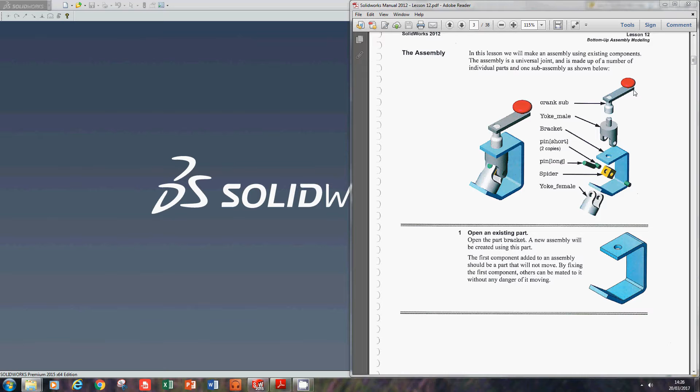The universal joint assembly is the one we're going to be covering in this video. To start with, we're going to create a sub-assembly of the crank sub you see here, which will consist of the knob, the arm and the crankshaft. We will then create the main assembly, and use this sub-assembly and add it to our main assembly. So let's jump straight in.

So I have Solidworks open here. I'm going to click on New, click on Assembly, and click OK. You'll see that it has popped open a dialog box here on the left hand side.

To begin the assembly, as it's saying here, I need to first add my first component. So to add my first one, I click on Browse here on the left hand side, and I navigate to wherever the folder of the parts that I want to use in the assembly is. For me it's already in it, and this is the first part I'm going to be adding to this assembly - this is the crank arm.

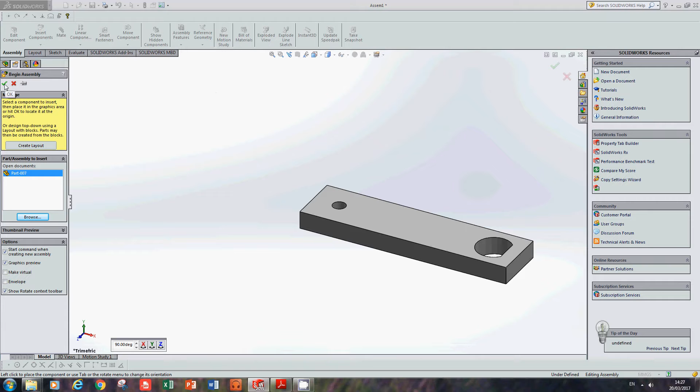So you'll see the arm is here, and to drop my first component, I don't just drop it anywhere. I come across to the left hand side and click the green tick, which is OK. Apologies for the pop-ups - what that does is place the first part and align it with the planes, the origin planes of the assembly itself.

So that's my first part dropped. A couple of things to note here - you'll see that this first part has a little F in brackets beside it, which means that part itself is fixed. If I left click and hold on this part, I can't drag and move it anywhere, so it's fixed in the space of the assembly.

That's what we're looking for every time we drop our first part. With any subsequent parts that we drop, we will be constraining them and adding mates to restrict their movement in relation to the first part or any previous parts that have been dropped, to remove their degrees of freedom.

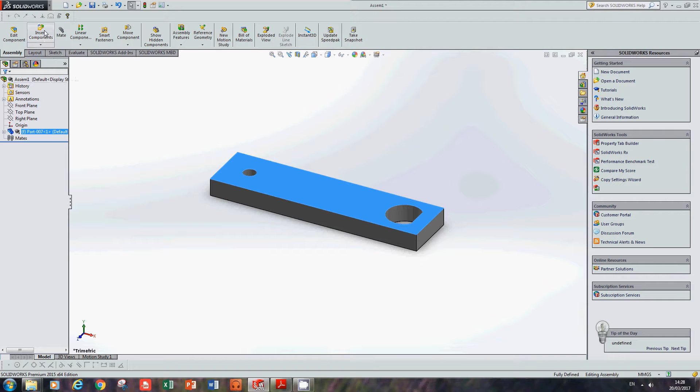So I'll come up to the top and go to Insert Components, click on that, and again I need to browse to wherever my components are. The second part I'm going to drop is part number 8. Click on OK, and for this second part I can just drop it anywhere I want here on the screen, so I'm just going to drop it there.

Again, these pop-ups are coming up because the parts were created in the educational version - you may have the same yourself. So the second part is dropped. If I click on that, you'll see that it's free to move - it can move anywhere within the space of the assembly. I need to remove those degrees of freedom.

In order to do that, I need to add a mate. So up to the top again and click on the paperclip and click on Mate. Unfortunately I've left a face selected before coming into mate, so I need to delete that from the selected regions. Now I'm free to pick what surfaces I want.

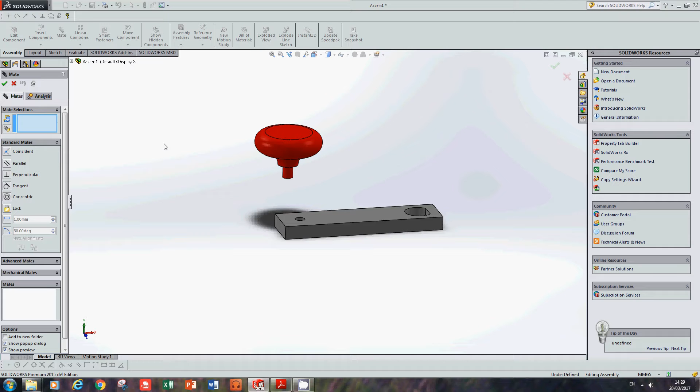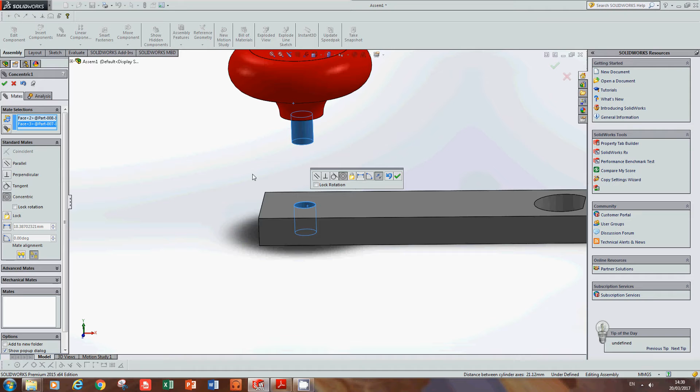The surfaces I want to mate - I want to align the center axis of this, so I click on this face here with the center axis of this hole, and you'll see it moves to align. Solidworks is quite intuitive and will make an assumption on what mate you want to apply - there are different mate types: parallel, perpendicular, tangent. Concentric is what I'm looking for in this case, so I can click OK, but always check before you click OK and apply the mate.

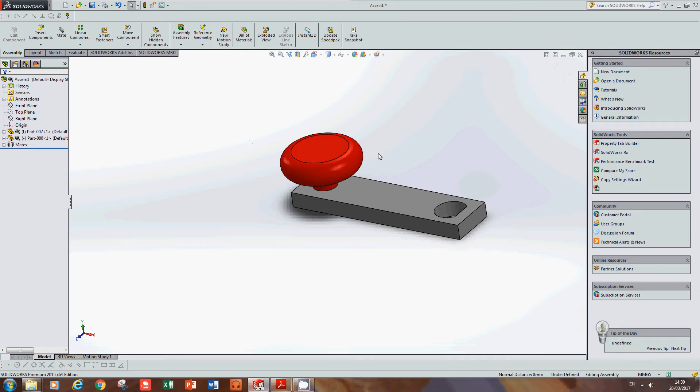Next thing I need to do is click on this top face and click on the underside of this face here, and that'll lock it to that. Coincident is the mate I want for this, because I want both of those planes or faces to be coincident, to be locked together, and I click OK to that. So that part is finished, and its degrees of freedom has been removed.

Next part I want to add - click on Insert Components, down along here to Browse, and click on part 9.

And this is the crankshaft. So I drop this again. I can drop this anywhere in space. Apologies for the pop-ups. So you'll see that this can still move - it's free to rotate. I need to do something similar to what I did with the knob with this crankshaft.

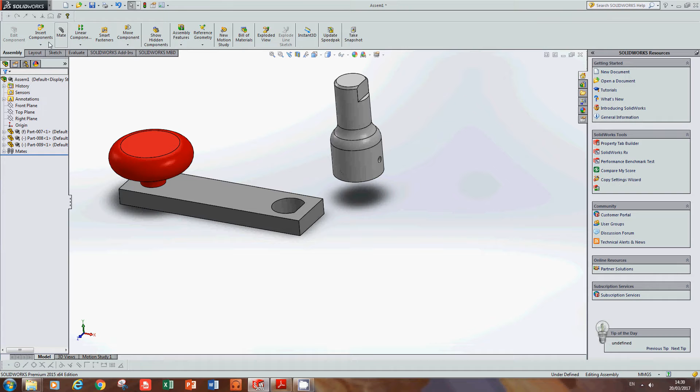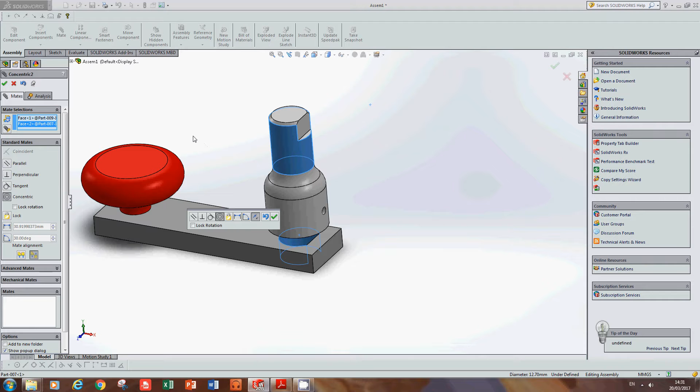So I click on mate again. I click on this outside face of the shaft, and this inside cylindrical face of the crank arm. Important thing to note: don't select edges or points where you can avoid it. We want to select axes or faces where we can, because it removes more degrees of freedom than selecting points or lines would. Double checking again that it's concentric.

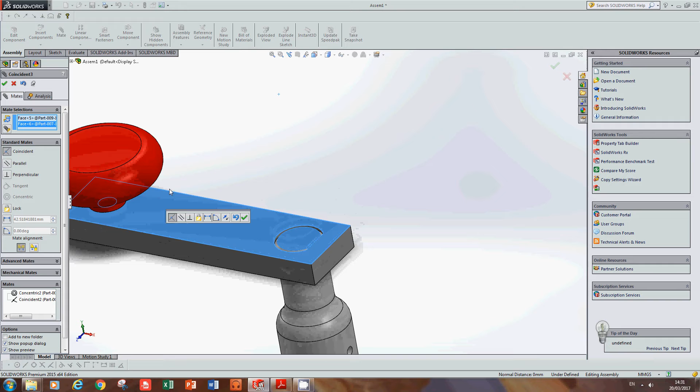It's exactly what I'm looking for, so I click OK to that. I want to align this face here with this face here. This has applied the coincident mate, which is what I wanted. Click OK to that, and then finally I'll select this face and this top face. Again, this is what I was looking for, so I click OK here.

So that's the first sub-assembly completed. You'll see that none of these parts can move.

So I'll save that, click on save, rebuild and save the document, and I'm going to call this assembly 1 - assembly 2 actually, for reasons that will become clear later - and click save to that. So that's saved, I can close that.

I'll just minimize that out of my way and come up and start on new. So I'm clicking on new assembly and click OK again.

Just to pop back to the drawing, in all cases when you're starting an assembly, you'd start with the main component, which would tend to be the largest component in a lot of cases. For this sub-assembly we started with the crank arm. For this main assembly we're going to start with the bracket, and then we'll build our assembly up around it - so it'll be the bracket, yoke male, yoke female, and so on and so forth.

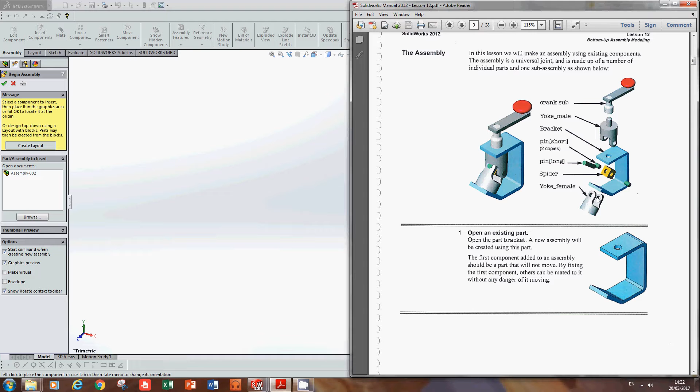Back into SolidWorks. Now just to notice here, you'll see that Open Documents tab, because I've left that previous crank assembly open, it's still active if I wanted to drop it. Now I don't want to drop it just yet, so instead I come in here and click on Browse, and I go to Part 1, and click Open to that.

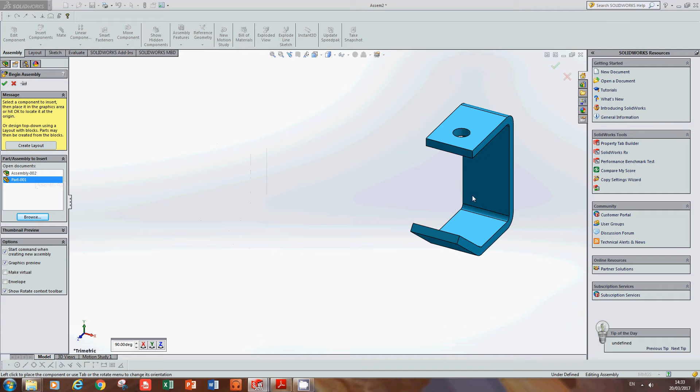I'm going to just make sure that you've just Part 1 selected, don't have the assembly selected. Just to reiterate, don't just drop it anywhere here - be sure and click OK, so that that first part is aligned with the origin planes of the assembly itself. So that's my first part dropped. Again, you'll notice a little F in brackets, which means it's fixed.

So I can continue to add some more components. Insert components, browse, and the next part I want to add is part number 2. Drop part number 2 in here.

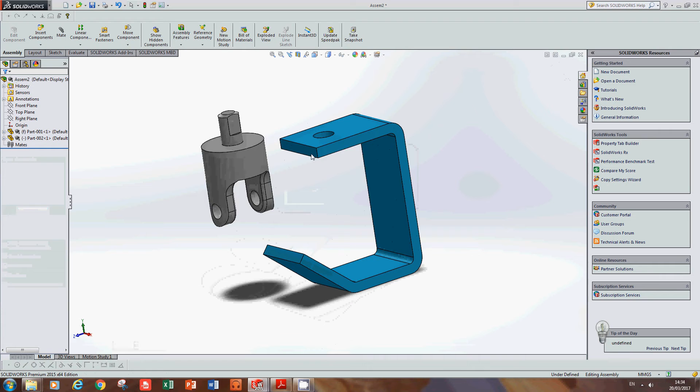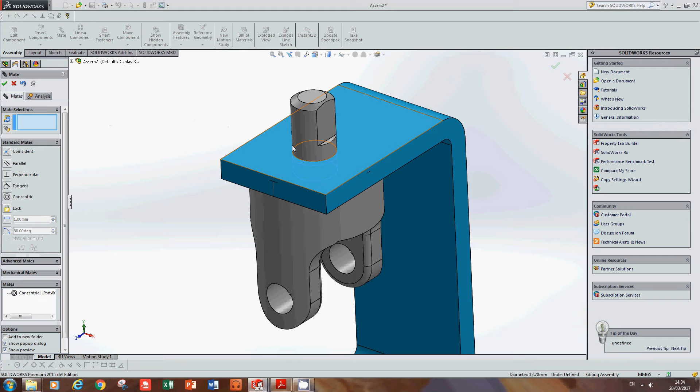So I'm adding my mates again to remove its degrees of freedom. In this case, I'm going to click on mate, this cylindrical face of the part, and this inside face of the bracket - don't click the edge, click on the face where possible. Concentric, just double checking my mate, so concentric is what I was looking for, and I can click OK to that to add it.

Now the next thing I want to add is a constraint or mate from this top face of the part I just dropped to the underneath of this face. Now I can't click on that face yet because it's hidden inside the bracket itself. If I want to get access to it, just left click on the part and you'll see that I can move it. Now be careful when you're doing that, because if I had left clicked and released, it would have selected the face, but when you left click and hold, it doesn't.

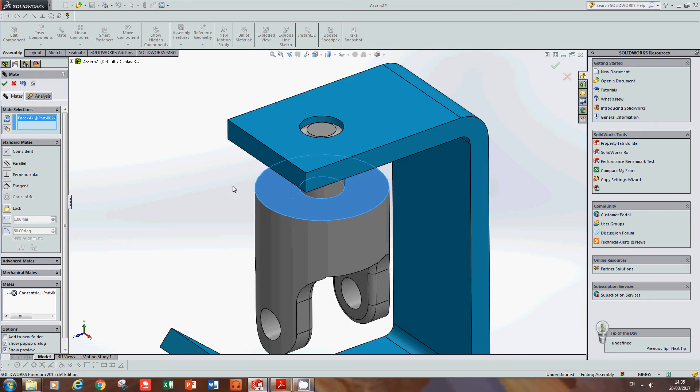So I'm just going to delete that out of there, and you'll see there, this is left clicking and holding, it doesn't select the face. Click on that top face, underneath of this, double check on my mate, which is coincident is what I want, and click add finish. And that's both mates - I don't need any more mates for now on that part.

Click OK, up to your insert components again, browse, and part number 3. So part number 3 is the spider. For this I can just drop it anywhere at all. Again, apologies for the beeping and the errors.

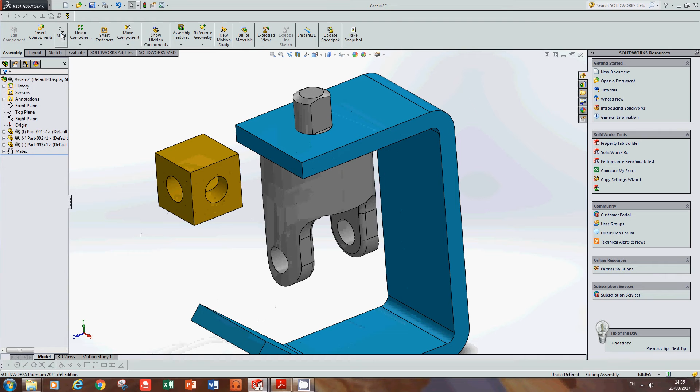Click on mate, and now I want to align the center axis of this part - the axis coming through here this direction - with this axis coming through the previous part. So I click on that center, that inside face, and I click on this face here, and that has aligned the axis of both of those.

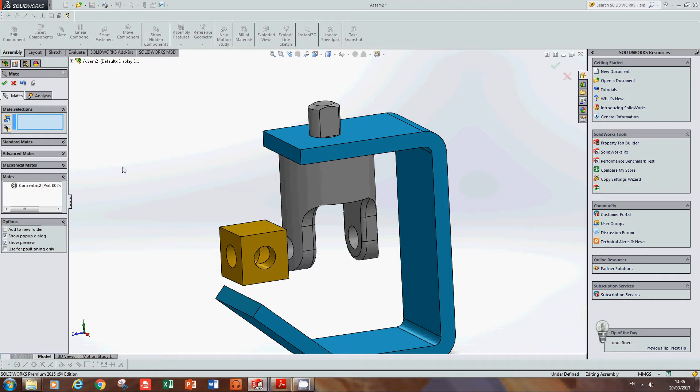Now I'm going to go into a different mate. These are standard mates we've been applying up until now, a selection of standard mates. For this next one, I want to apply an advanced mate.

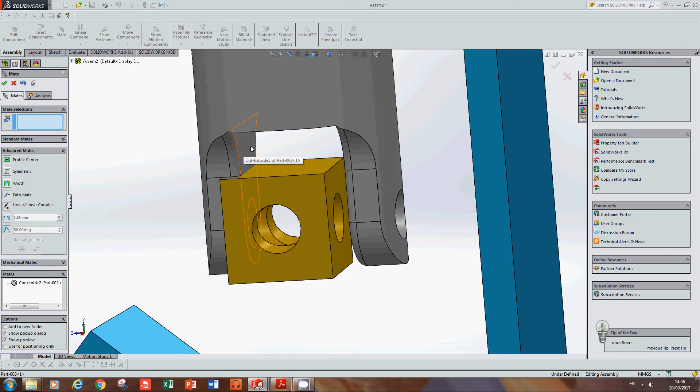What I'm looking to do in this case is move this roughly into the center of it for now - bit off center. When we're modeling, we'll be modeling for the ideal scenario, which means I want to have this part directly in the center of this gap, this width we'll call it for now. In order to do that, I apply a width mate.

What that does is, say for instance this edge was 20 and the gap was 25, if I apply a width mate, it will leave 2.5 of a gap on the left hand side and 2.5 on the right hand side, so it keeps it symmetric. But don't use the symmetric constraint, use the width.

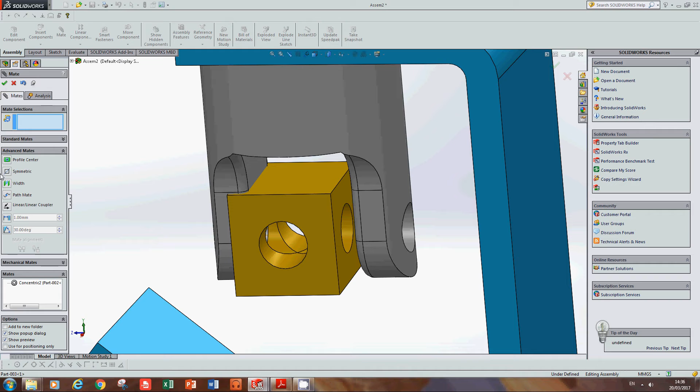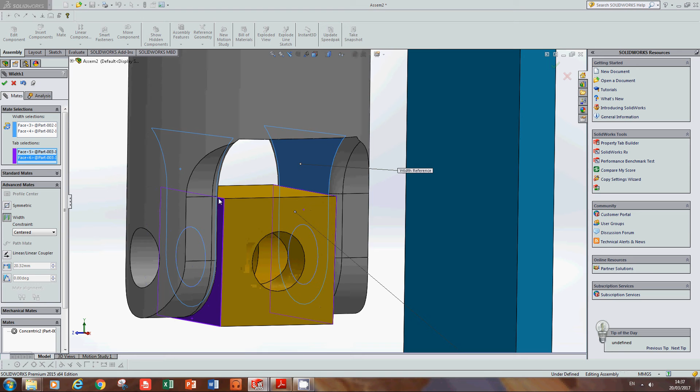So we click on width, and the first thing it's looking for is width selection. For that I select my outer edges - this face here and this face here of my first part, the larger part. Next I want to select the tabs, so this face here and this face here. You'll see that it has moved such that it's perfectly central to the gap itself, and click OK.

That's all the mates I need to apply to that part for now. So this is free to move - it still has 1 degree of freedom, but we'll look at that in the next couple of parts.

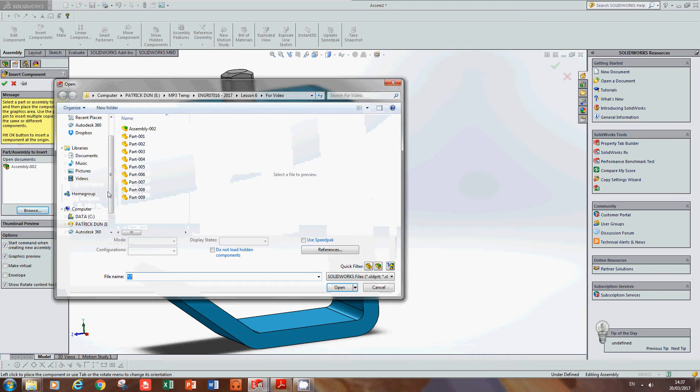Insert component, browse, part number 4 - the long pin. I'll drop that anywhere. Click on mate, click on the cylindrical face of this part, and the cylindrical face here as well. That's aligning it concentric, exactly what I'm looking for.

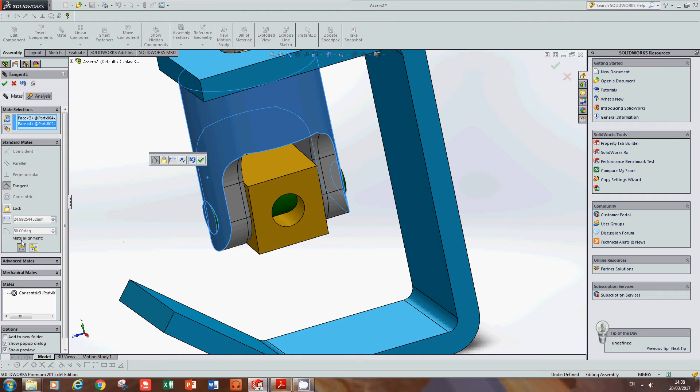Next I want to align this face with this face, and I want them to come in flush like that. Just to highlight another command that might have popped up for some of you - sometimes it will anti-align or misalign the parts. So this is aligned and anti-aligned. You'll see here that this has the pin outside of the part, which isn't what I'm looking for. In order to flip that direction, I just click on aligned.

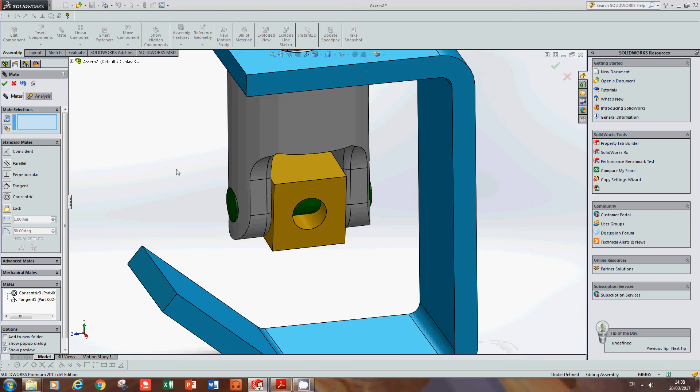If you think it's completely opposite to what you want, try this button here, this mate alignment. So that's what I'm looking for there. Click apply, click OK again to that.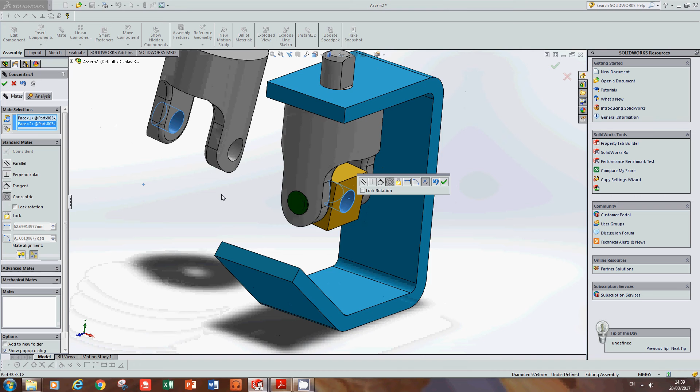Next component, browse, part number 5, which is yoke female. Just dropping that here, and the first mate I'm going to apply is mate, cylindrical face, and cylindrical face here. That's aligning those - click OK to that.

Next mate I'm going to apply is the same as what I did with the yoke male. I want to apply the advanced mates here, and use this width. So select this face here, this face here - that's the 2 tabs for the larger part selected.

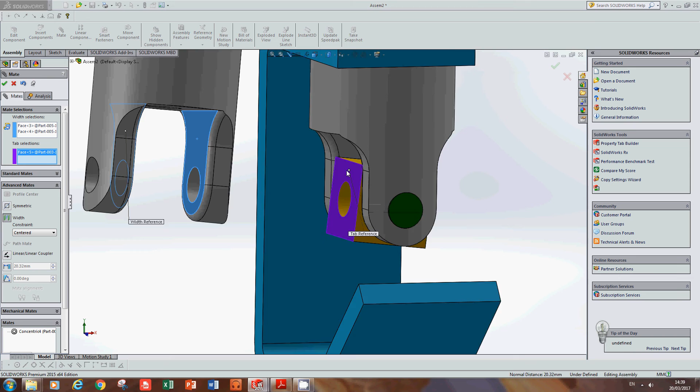Next I want to select the 2 tabs on the spider, selecting this face here and the opposite face on it, this one here. So that has aligned those and kept any gap that might be in the width of it, and kept it symmetric.

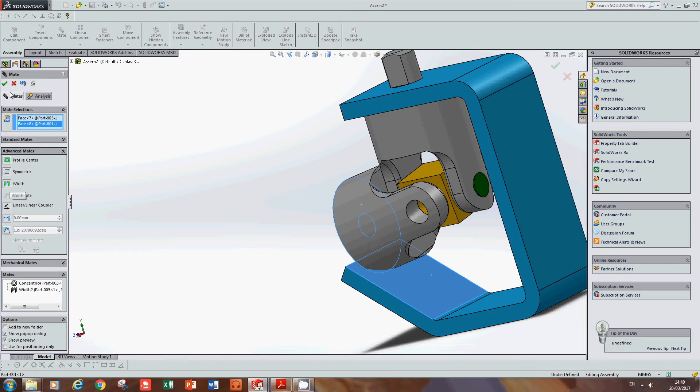Next I want to rotate this down, and I want to have this face parallel with this face. Unfortunately I left on the width constraint, so I just need to click cancel to that and start again. Click on mate, click this face here, and click on this face here, and that's applied my parallel relation here, which is what I was looking for.

If I needed to change it for any reason, you can click on it there. So click OK to that, and that's that guy dropped in.

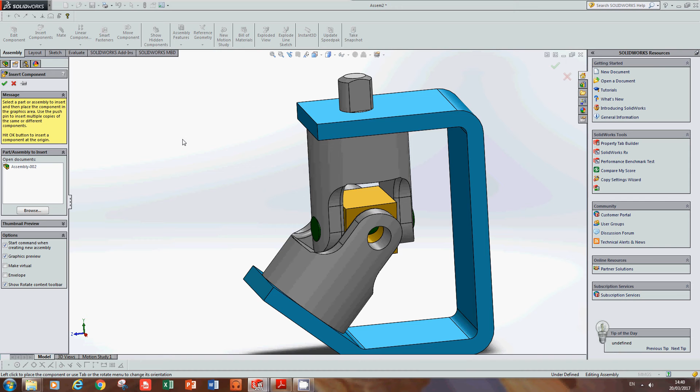Next component is part 6. So browse, part 6 is the short pin. Click OK to that.

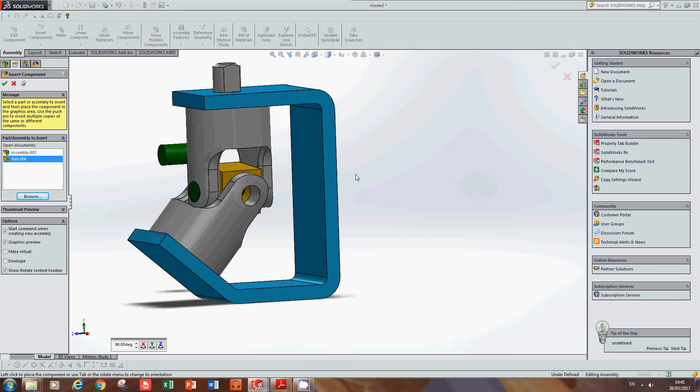Before I drop this part, notice this keep visible pin at the top. If I click on that before dropping a part, it allows me to drop multiple parts. So I can click on this, drop one, it'll leave it active for me to drop a second one, since I need two of these pins. I'll drop a second one, click OK, and then click OK to that.

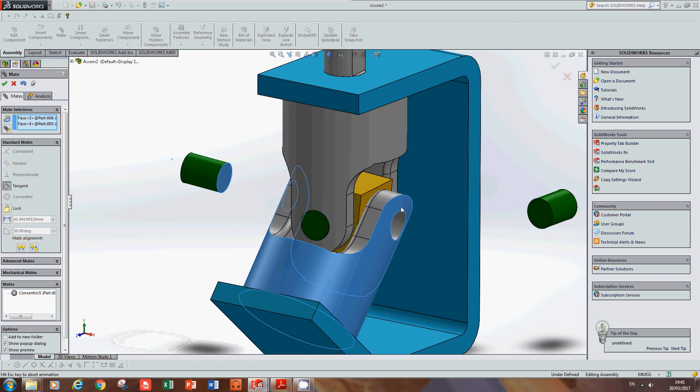Similar to the long pin, we need two relations or two mates here. Click on mate, cylindrical face here, cylindrical face here, that's the first one. Then select the end face of the pin and the end face here. Notice it has applied it in the wrong direction, so I just select aligned and it brings it across. Click OK to that.

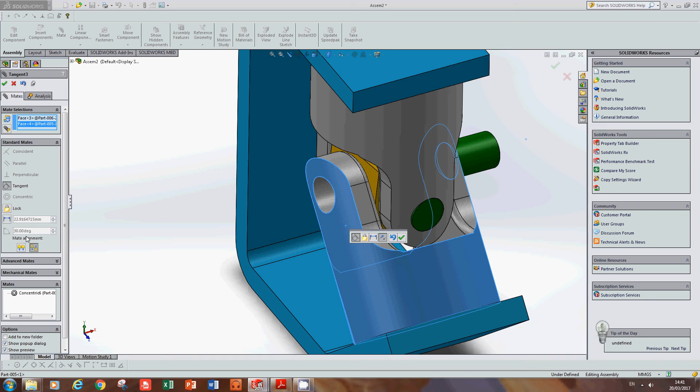That one's finished, so click on mate again, cylindrical face here, cylindrical face here, that's aligned. Then click on this face and this face. Again wrong side there, so click on aligned rather than anti-aligned, and click OK to that.

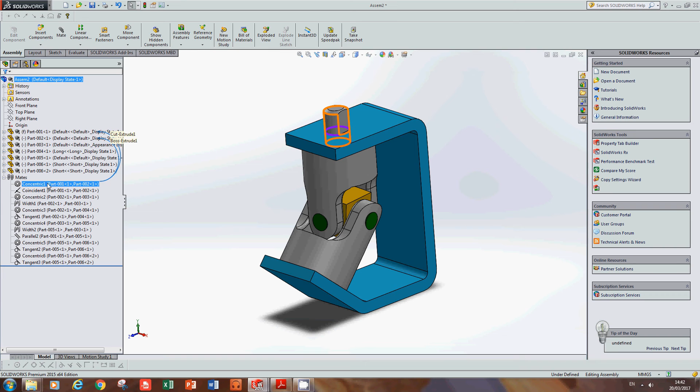Before I drop in that sub-assembly from previously, any mates I've applied go into a folder here at the bottom. It gives me a selection of whatever mates I've applied, tells me the type of mate and between which parts. So this is a concentric mate between part 1 and part 2, and it highlights it on the right hand side.

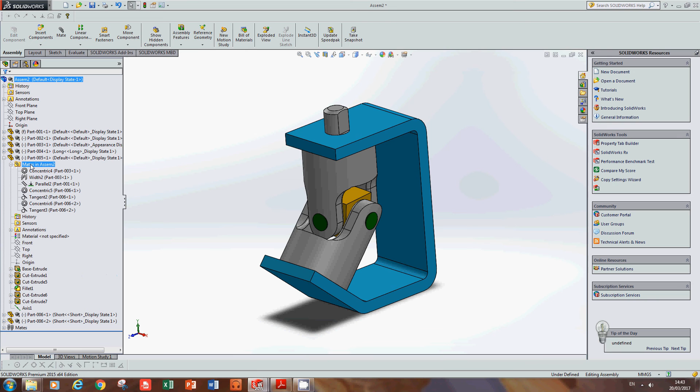I can also check the mates of each individual part by coming in here. If I click the plus beside the part and go down to mates in assembly 2 - assembly 2 is the assembly I'm working in since I haven't saved it as anything else - it tells me what mates have been applied to this part. So if I needed to delete or edit them, it's an easier way to find them by going into the individual parts if I know which part has the mate or constraint I need. You click the plus on any part and the top folder there should be mates in assembly, giving a selection of what mates are applied.

Final step is to add the crank handle assembly. I go to insert components, and now I can just click it from my open documents. If it wasn't there, I'd click browse and select it from there. So assembly, that's the one I'm looking for, and I'll just drop that anywhere.

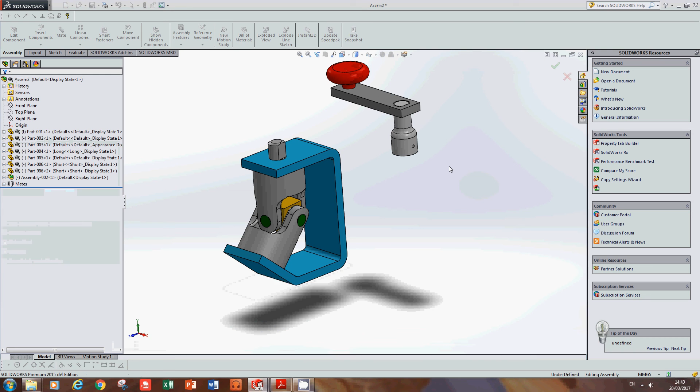Time to add the mates to this guy. So I want this cylindrical face here to be aligned with this face here. That has added my concentric mate. Click OK to that.

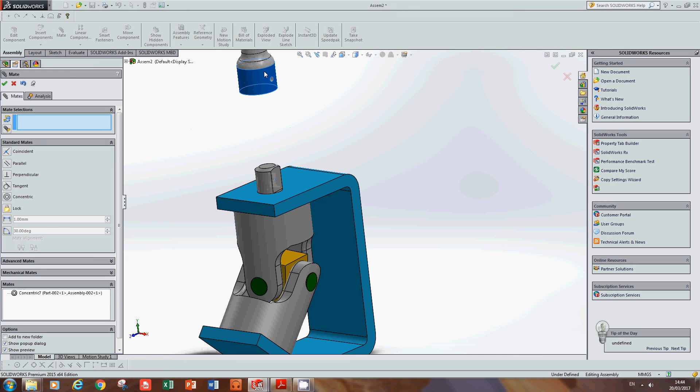Now the faces I need to align next are hidden, so left click and hold and I can drag it up out of the way and release, double checking you haven't actually selected the face here. If you have - say if I'd clicked that without left clicking and holding - I just come across here and delete it from that.

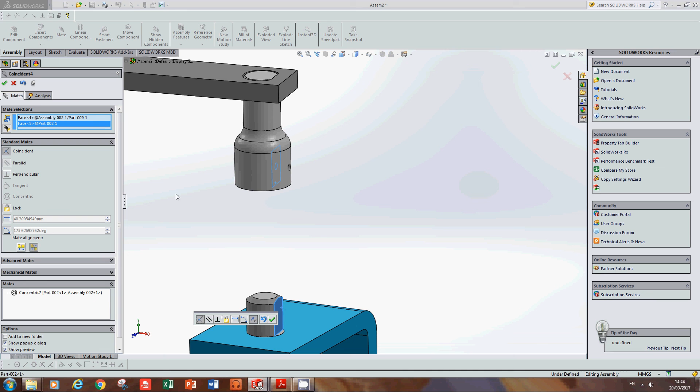What I want to align now is this face here, and make it coincident with this guy here. You'll see that has made a slight rotation. The coincident constraint is applied, and I click OK.

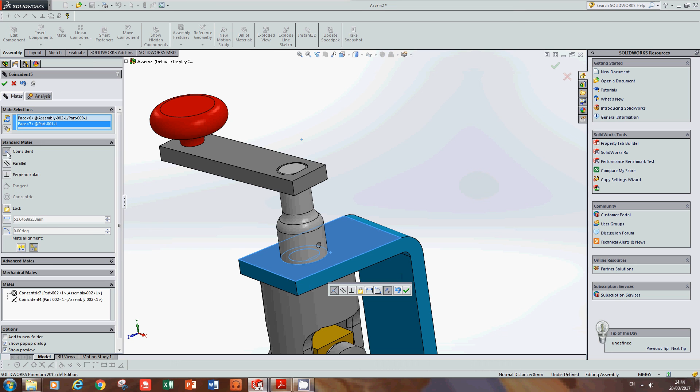Finally I mate this face here to this face here. Now say for instance you didn't want it directly flush off that top face, you wanted to leave it up slightly so the shaft wasn't rubbing off the bracket itself. In that case, while it's applying the coincident constraint, I can add a distance instead. If I select distance, I can set that to 0.5 of a millimeter, then left click in here to activate it, and that leaves 0.5 of a millimeter gap between those two surfaces. That's applied there.

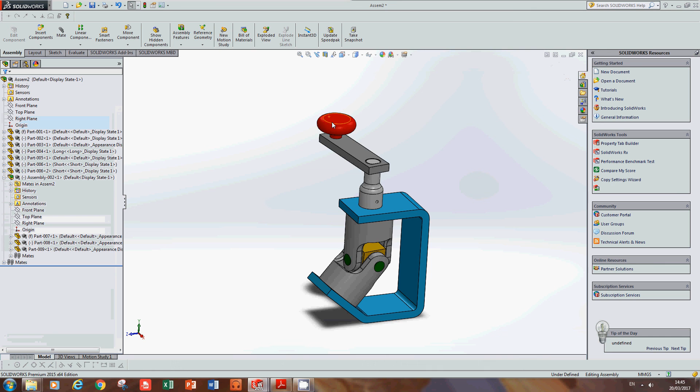So if everything is working correctly, then this should be free to spin and rotate.